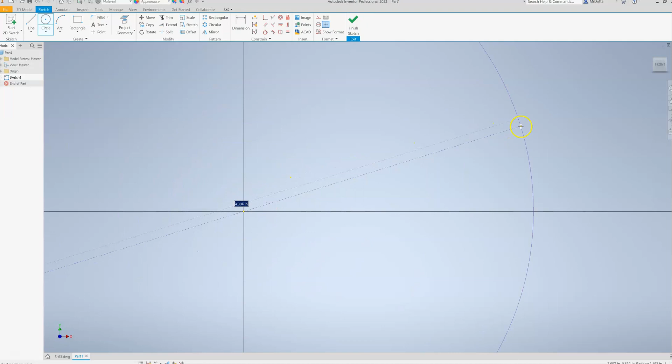Now I'm not going to draw this to the same dimensions as your worksheet. I'm not going to do everything exactly the same. I'm going to make up some dimensions. But I'll make it similar.

So we make the two sets of cylinders. Now, notice that I am doing these inner circles right away. I'm doing it in the same sketch. If you only draw the big circle on the outside and then you extrude this cylinder, then you got to come back, make another new sketch, and then make this hole.

But if you draw the circles inside now, then when you do the extrude, it's done. The hole is already done. So it's a more efficient way to go about it. So if you have a hole that you can put in the sketch right away, make it part of the extrusion, that'll save you time.

So this is the tricky part. This next part, we're going to talk about using constraints. So constraints are nice because you can force behavior. You can force lines and circles to do things that you want them to do. You can force lines to be parallel. You can force circles to be centered.

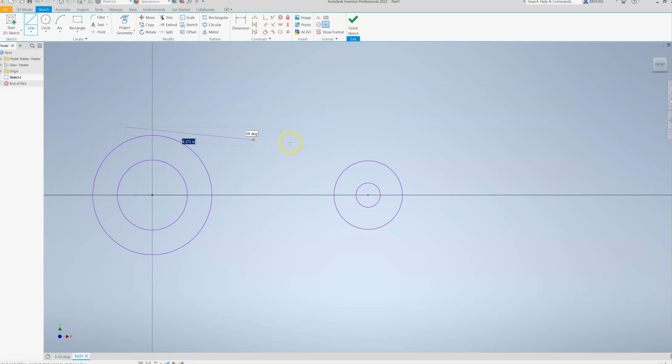Okay? And in this case, we are going to use tangent. Believe it or not, this line that connects these two cylinders does not go from one quadrant to another. It actually snaps tangent. So we are going to draw a longer line than it needs to be. So I'm going to go past the point of the quadrant.

I'm going to go longer than it needs to be. And I'm just going to get close to the top of the cylinder. I'm not going to touch the circle. And then I'm going to do the same thing on the bottom edge. I'm going to get close, make it a little longer, and then I'm going to use my tangent constraint to force it where I want it to go.

Now, sometimes applying a constraint can make things happen that you don't necessarily want. For example, it could throw off your centers. It could throw something else off by forcing one thing to happen. It could make something else happen that you don't want.

So actually I'm going to apply another constraint as well. I am going to apply a horizontal constraint. And this is going to allow me to force these sets of circles to stay put. It's going to force them to stay on this plane, on this axis, right?

So if I click on this center, and then this one, now they can't move. Those two circles, or those four sets of circles, cannot move off of that plane. And if I don't do that, when I do my tangent constraint, it will force the centers to move sometimes.

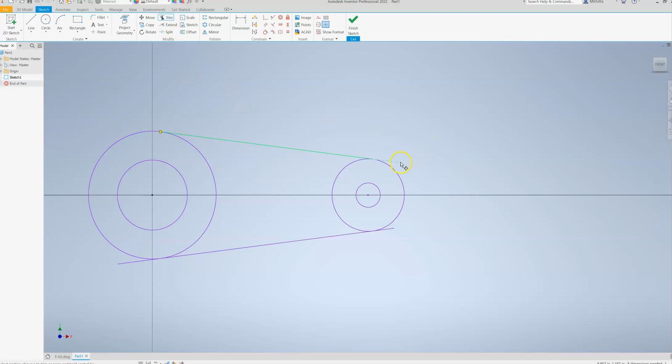So now I can do my tangent. You're going to click on the circle, and then the line. Then the circle, and the line. Circle, line, circle, line. All right, now you can trim off the excess. Finish sketch.

Extrude. Now, the next really cool thing I want to show you is two things: doing multiple extrudes at once and doing a symmetrical extrude. So with this shape, this 5-63 is a very interesting drawing in that if you split it right down the middle, it's symmetrical on both sides, right?

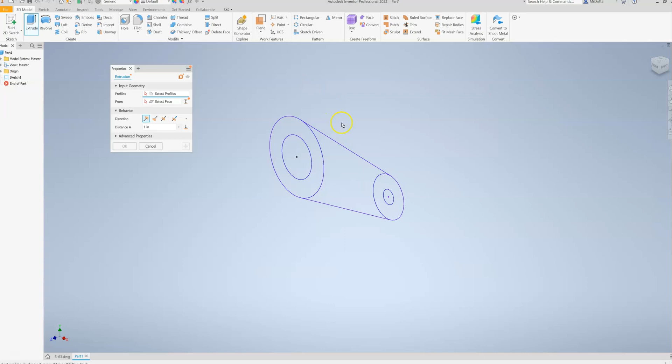So instead of doing an extrude where you come off of the face in one direction, we're going to do symmetrical and split it in half. Now you want to enter the value that is on your worksheet, right? It says 2 on your worksheet. So that's what you would want to enter. It will automatically split it in half for you.

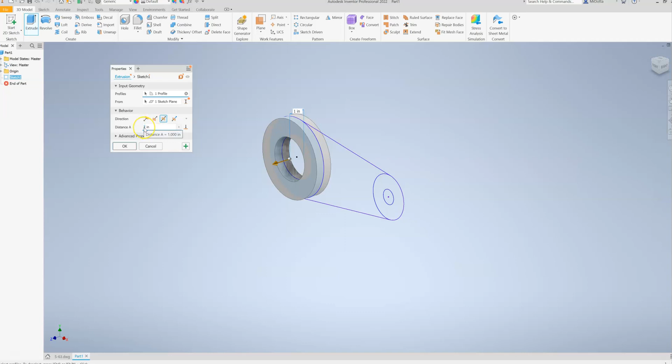So you put the value in, the overall value that it calls for. I'm going to put in different numbers, remember, because I'm not doing exactly the same thing. Now, instead of saying okay and then starting over again, well, what happens when you say okay?

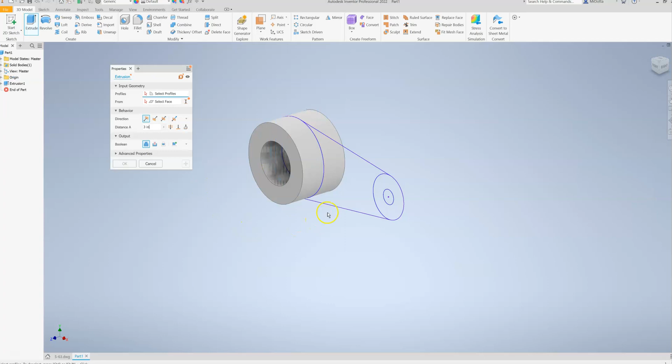Your sketch disappears, right? Well, yeah, you know how to bring that back now. You know how to turn visibility back on. But instead of having to go through that trouble, hit the green plus mark and add a new extrusion right from here. Plus, do your next section, adjust your settings, say OK. That's a little bit small.

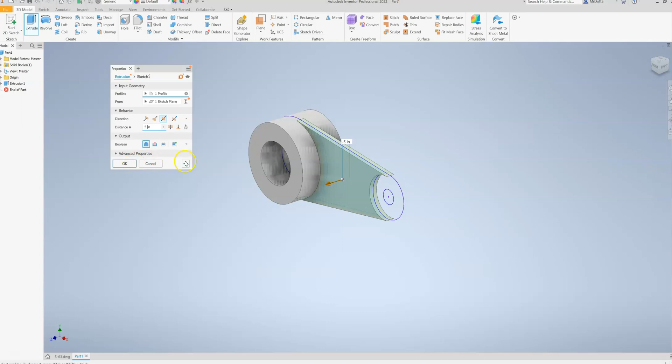I'm sorry, don't say OK. Hit the plus mark again. And do your final extrusion. Symmetrical. Distance. And now you are done.

In one shot. You did everything in one shot. All 3 extrusions. Your holes are done. And you can go ahead and make your drawing file. It's that easy. Thanks for watching.